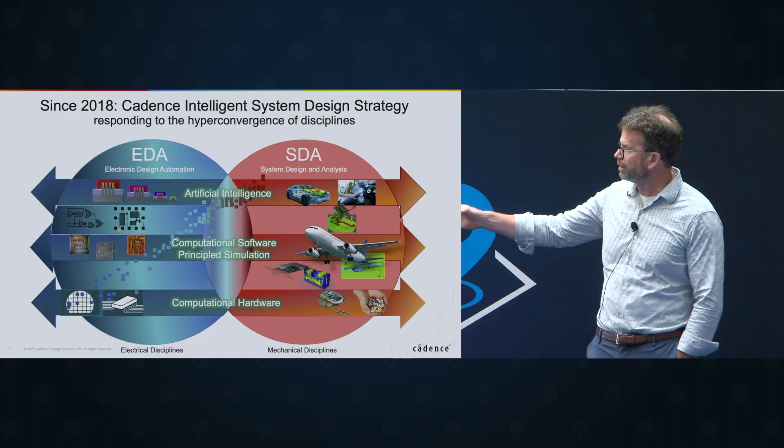So our CEO at Cadence likes to call this a three-layer cake. Now, a cake isn't exactly that exciting, but the reason he calls it a three-layer cake is because when you slice a cake in any way, you slice it vertically. And so every representation of our simulation software gets all three layers. The layer I'm going to tell you about today is our CFD layer.

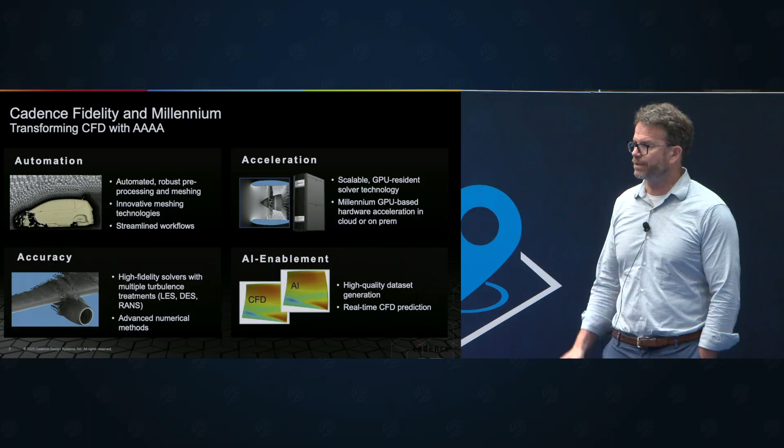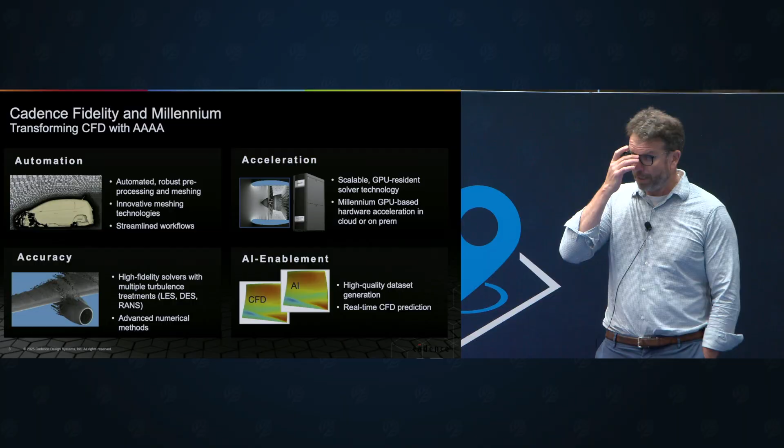So in CFD at Cadence, there have been a number of acquisitions over the last 7 years, and there have been a number of internal organic developments, and we're bringing them all together into CFD products that have these four driving areas as their focus, and they all start with A. My youngest son has been trying to get into college lately, and so A is really resonant in our family these days, and so I thought, yeah, 4 A's. Who doesn't want that? The 4 A's we're talking about here are automation, acceleration, accuracy, and AI enablement.

So on the automation side, that's automation not just on the CFD part, but all the preparation for CFD, even the post-processing of CFD. It involves innovative geometry and meshing technologies and thinks about workflow as well. On the acceleration side, that's partially workflow related, but also, of course, we're all on a GPU revolution, and our tools were very early on in that space as well. Accuracy is still mission critical.

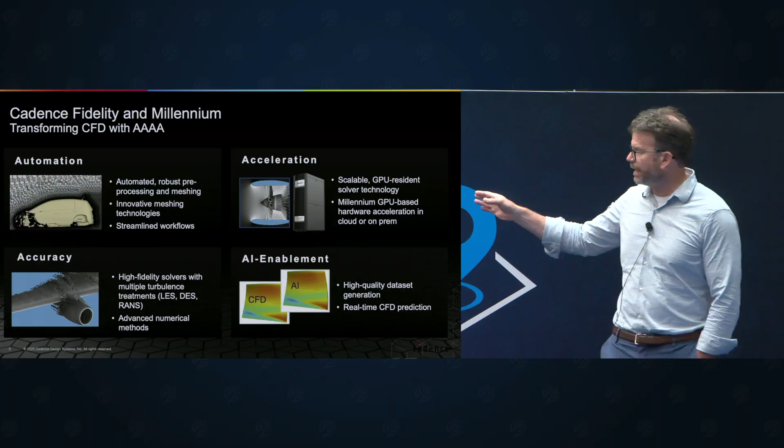One of the reasons why CFD isn't even more important than it should be is because there just isn't the accuracy there for action in some cases. And a path to that is really through high fidelity. I'm going to talk about that a little bit today. And then finally, how is AI going to fit into all this? I mean, AI enablement, it will have a number of paths. Part of it will be in the way that the software is used, but part of it will also be in the way that we build models.

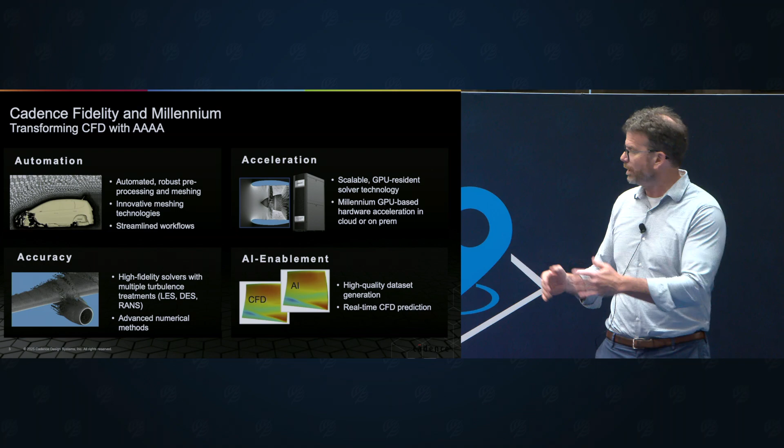All right, so a little bit on some of the tools that have come together. Some of you are probably familiar with Fidelity Pointwise. It's used pretty extensively in the aerospace industry. If you looked at Pointwise a number of years ago compared to Pointwise today, what you would be remarkably aware of is the level of automation that's been introduced to a tool like this. Many of the features that used to be much more manual are now being automated. And so the scripting that supports some of the work that you do in a tool like this is much shorter, much more functionally capable.

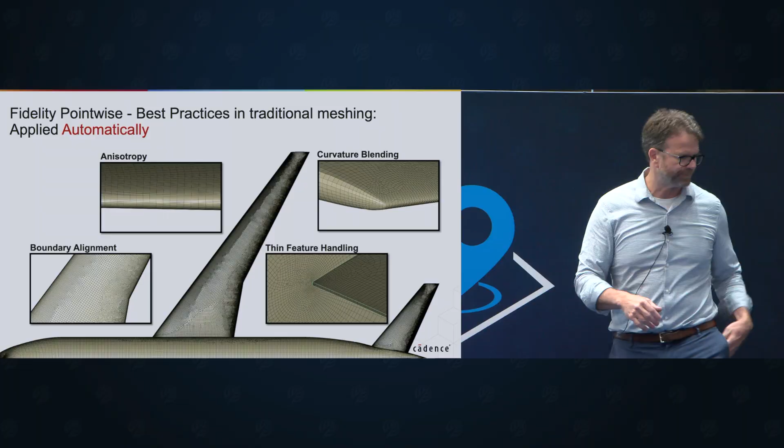That's the space of traditional grid generation at Cadence. In our high fidelity offerings, we actually use quite a different grid generation technology based on Voronoi diagrams.

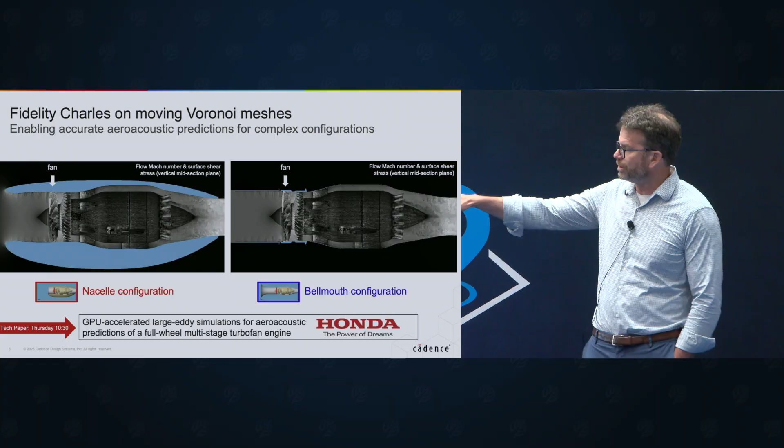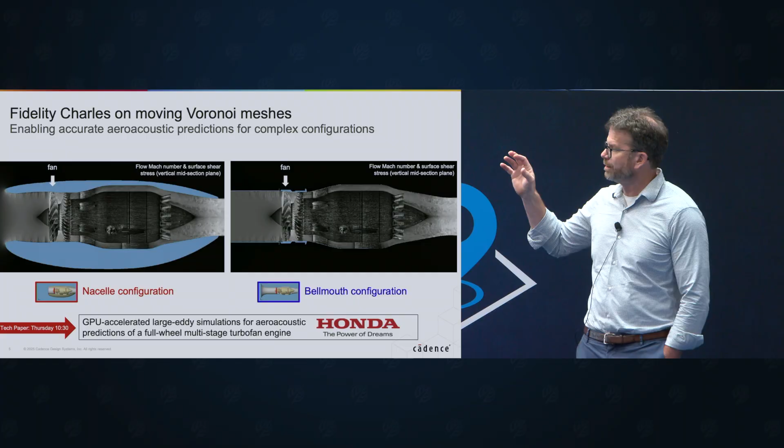I'm borrowing here from a slide from a presentation you can go see tomorrow, just to illustrate how complicated some of these calculations are getting. These are aeroacoustic calculations of a full wheel multi-stage turbofan engine, where Honda and Cadence have collaborated to run these calcs and compare them against data. The grid generation is based on Voronoi diagrams.

Now, the interesting thing about that particular grid generation technology is it doesn't have to stay isotropic. You can actually introduce anisotropy into the grid. We've had anisotropic grids forever, but in this case, it's Voronoi diagrams introducing anisotropy.

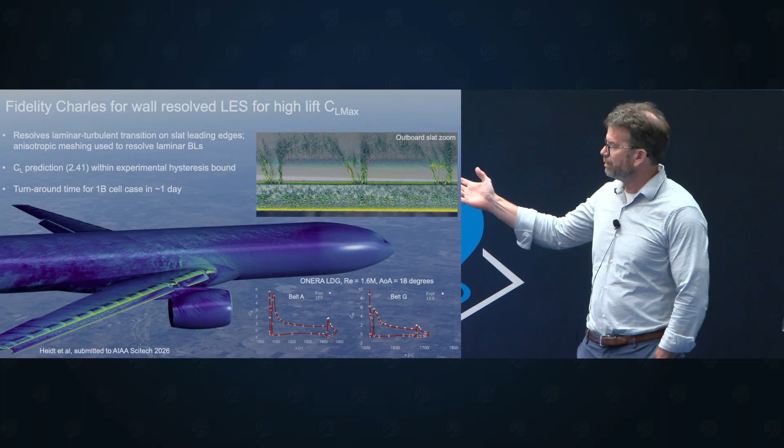And that actually allowed a real hero calculation to take place earlier this year. There was a calculation of one of the configurations from the high lift workshop, but instead of running it in a wall modeled way, it was run wall resolved. So here you're actually adding viscous resolution to the boundary layer. So why would you do that?

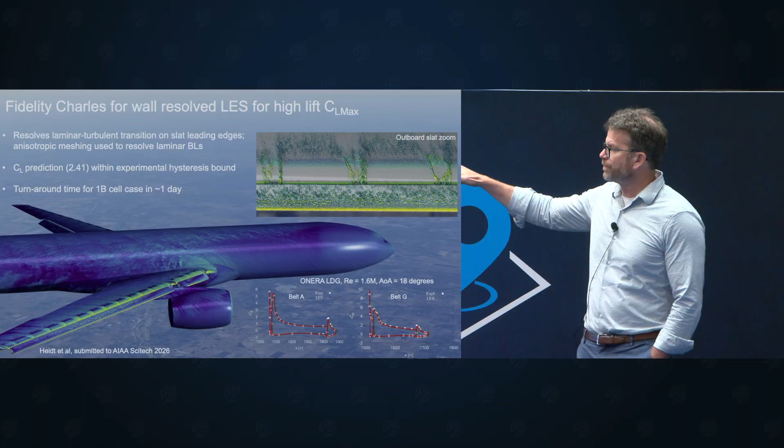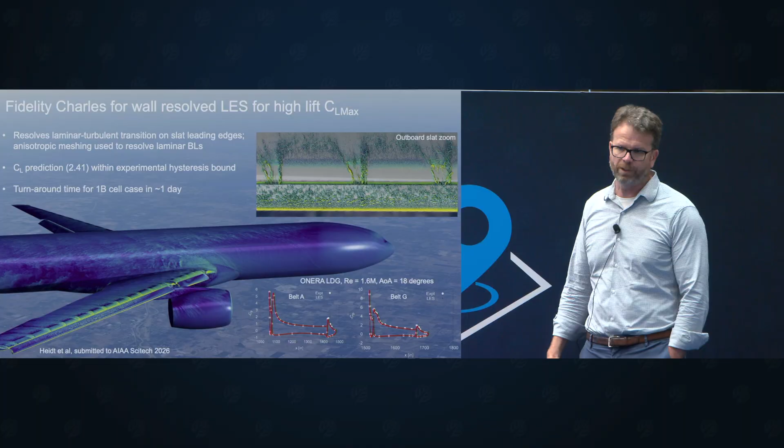Well, the reason you do that is because there's an important transition happening on the slat. You can see it up there. If you don't capture that transition, the way the flow is set up for the rest of the wing is all wrong. And so capturing that slat transition was possible with wall resolved LES, and it could be done in about a billion cell mesh in about a day on quite a few GPUs. So that's an accessible calculation.

Partly because of the way CFD has come into Cadence with such a GPU thrust, and also all the other drivers in the industry, Cadence has adopted GPU computing very thoroughly. Now we have our own version of GPU accelerated hardware available on the cloud, or you can buy it on-prem. And the software technology stack, that middle layer of principled simulation, isn't just in the CFD area. It'll span all the way from EDA through to molecular engineering flows, drug discovery. These three layers are finding their way through Cadence everywhere.

All right, so how long does it take to do something interesting on a bunch of GPUs? The calculation on the left is a high lift calculation again, where you're looking at trying to predict the stall at high angle of attack, and you're doing it in a wall modeled setting. Nowadays, this is something like a 2-hour calculation for 20 convective time units.

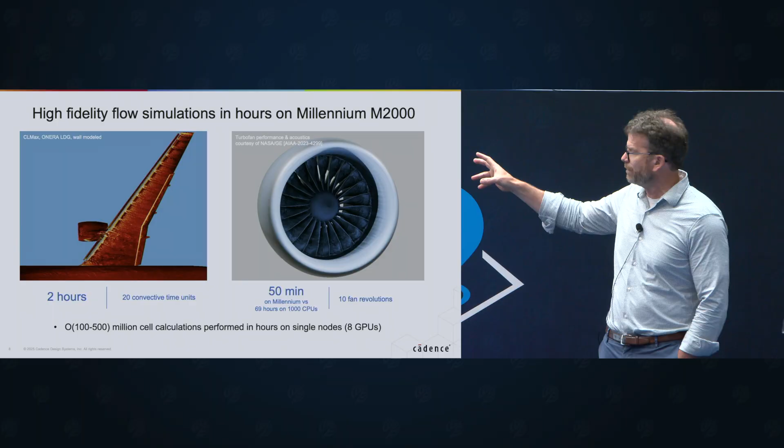On the right, there's the turbofan calculation where you're going after the acoustics of the fan, not just its performance, but its acoustics. And that can run 10 revolutions in 50 minutes, which is enough to do your post-processing of the sound, the noise signature. So this is really a game changer for these high fidelity methods. You can access parts of the operating envelope in a robust way that you just weren't able to historically.

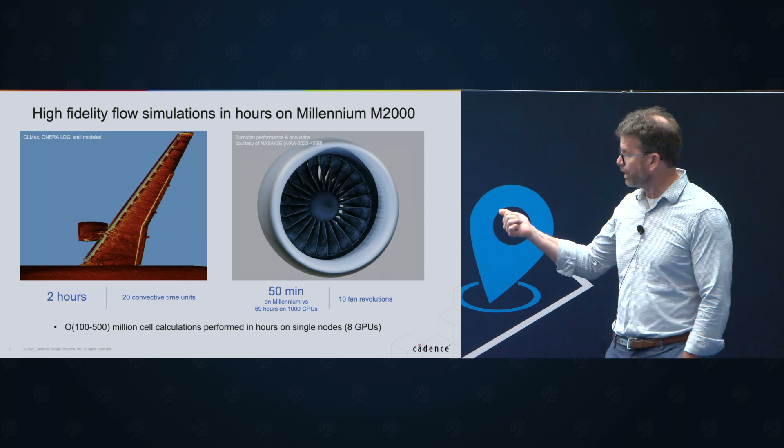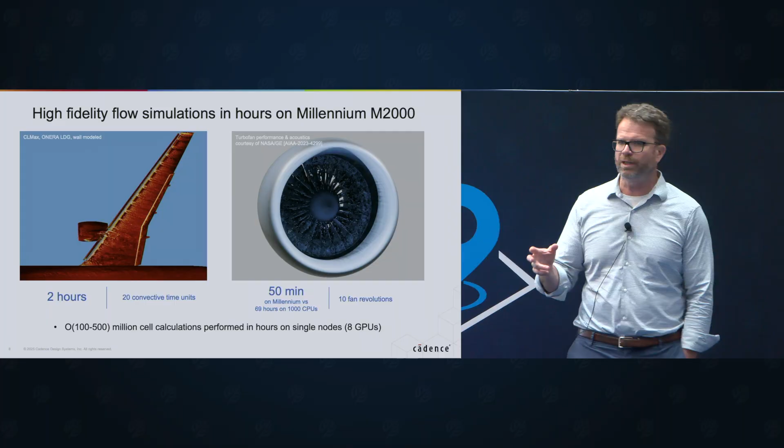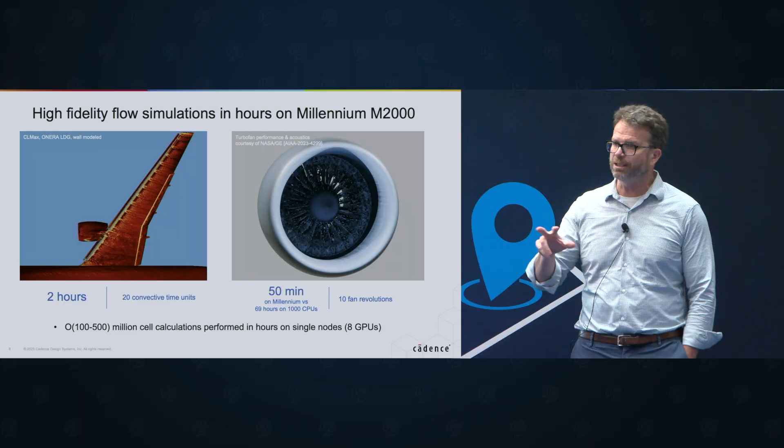All right, so I think I've covered acceleration, accuracy, and automation. The last piece of the puzzle is AI. There's been a lot of talk here at the conference about AI. What are we going to do with it? I think anybody who develops software recognizes AI is going to find its way into how we program our codes, and into how users interact with those codes through chatbots and agentic interactions. But one of the interesting ways it will as well is in how we build reduced order models.

There was a panel discussion yesterday that Cadence participated in along with ANSYS and a few other folks, where we looked at some of the offerings becoming available in this space.

At Cadence, what we're focused on is a technology called geometric deep learning. So instead of thinking about a geometry as a parametric object full of parameters, we're actually going to describe it as a surface, a triangulation essentially that describes the nature of that surface. It turns out these models can learn about those surfaces and then predict, as those surfaces change, how the responses will change as well, like the pressure distribution on those surfaces.

I think a lot of people have seen this sort of flow before. I want to show you a flow you probably haven't seen, but it's still possible to stand up.

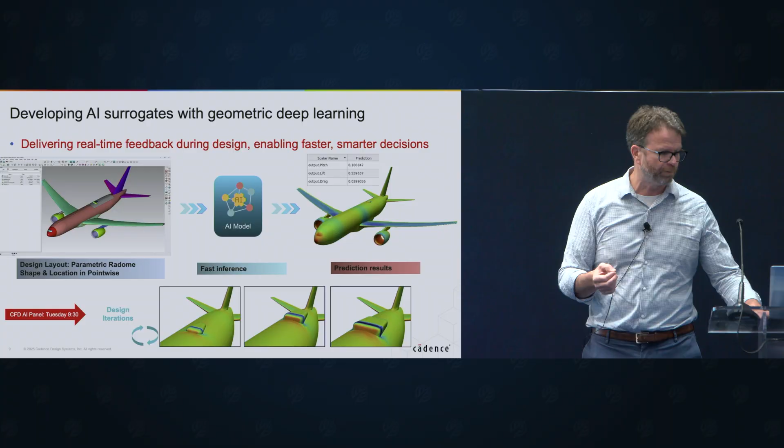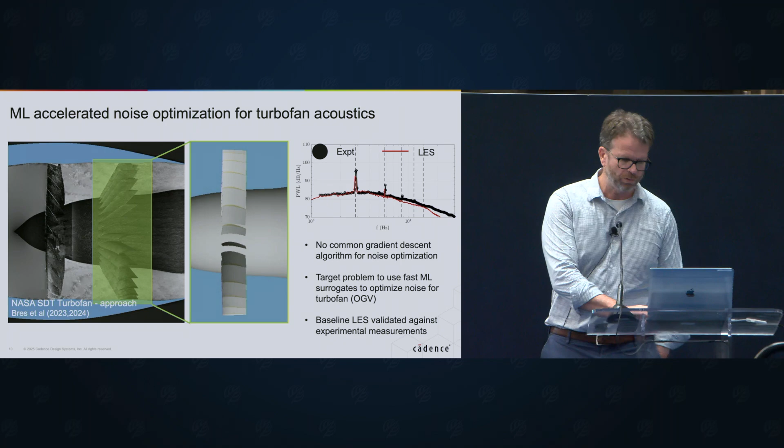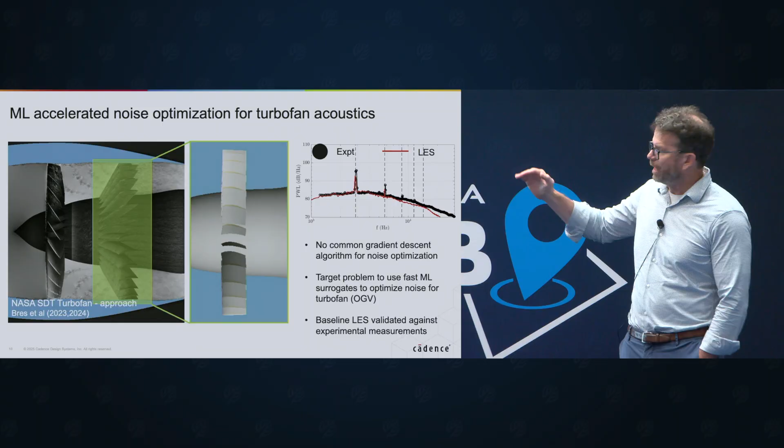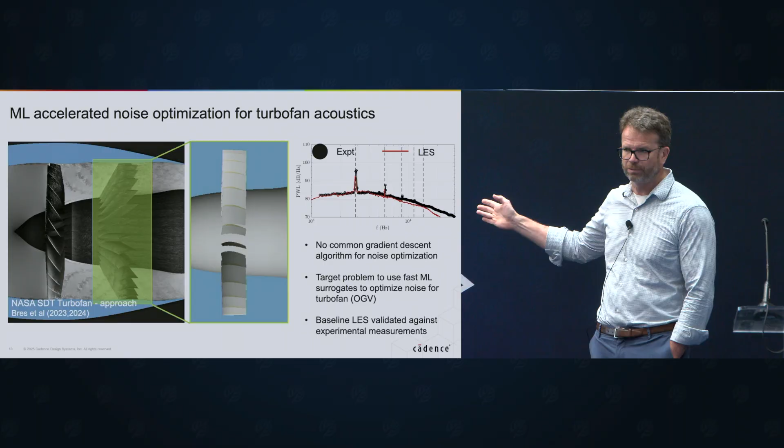That's predicting aeroacoustics. In this case, we did an internal experiment where we took the turbofan problem I showed you earlier, at least something related. This turbofan is the NASA SDT, and it has experimental noise associated with it, and it's already been fairly well optimized for its sound. But the outlet guide vanes are a big degree of freedom in a device like this—you can sweep them differently and give them slightly different angles. So we used AI to learn from a few different simulations where we adjusted both the sweep angle and the angle of the blades, and had AI predict the spectrum. The output of the AI model was not the overall sound pressure level, but the actual details of the spectrum, and it turns out you can do this pretty well.

It's a little hard to see, but these are a few of the different spectra predicted either by the full LES or the ML prediction. You're controlling the sound of this device by both reducing the tonal content of these tones and also reducing the overall broadband sound content. You can very quickly produce one of these maps that shows you what the operating space is like and where the optimum is. Normally you would populate it with some kind of tensor product grid and run 64 calculations. In this case, with a handful of calculations, because the ML can pick out the modal content of what's going on, you can arrive at these maps fairly quickly.

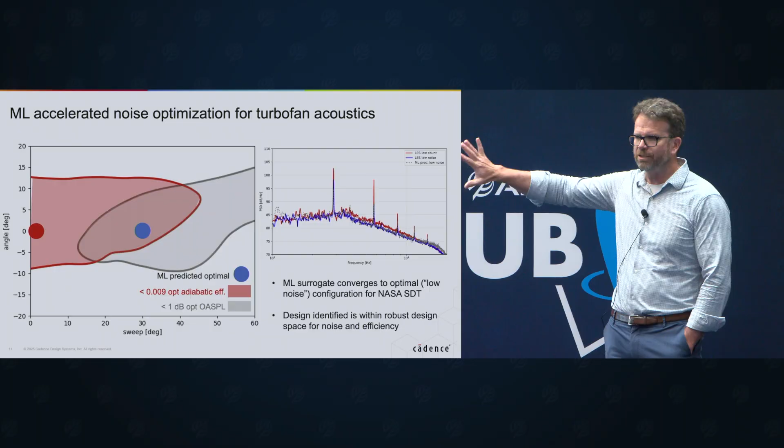So what are these maps? You've got two regions of interest that are also in contradiction. The red region is where you're keeping the adiabatic efficiency within about a percent of the peak efficiency. The gray region is where the sound is within 1 dB of its quietest. These two regions pull apart from one another, but there's a nice robust region in the middle where the design can live. Getting to this place quickly is what AI can enable, and this illustrates that possibility.

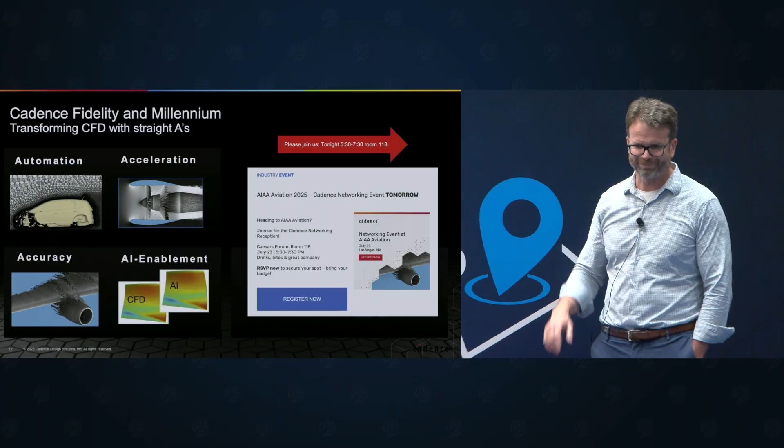So, anybody have any tough questions for me? I was going to ask, does the geometric deep learning method allow for topological changes, like surface genus change? Yes. You've got to learn more, admittedly, because the mesh will change, but that's one of the nice features of that approach—it can certainly allow for topological changes. If the model were large enough, the topology could change dramatically.